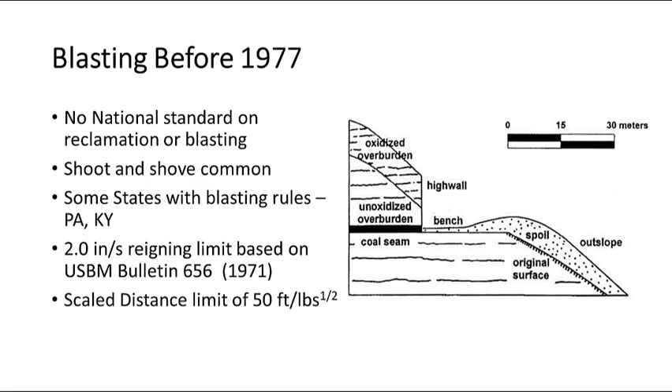So how did we get pushed into not only a blasting standard, but also a reclamation standard? Well, it all started with the Arab oil embargo of 1973, all right? And there was a smaller event in 79, but I'm gonna focus on 73. And what's interesting is if you look at the coal production over time from 1950 to 2010, and you look at where coal production was in about 1973, we were at about 400 million tons, 500 million tons on an annual basis.

And when there were long lines at the gas stations and people were concerned about energy independence, the government took on initiative to promote a move from oil to coal, natural gas, and/or nuclear power. So at that point in time, what happens to coal production? You see this constant rise up to well over 1 billion tons on an annual basis being produced, and a similar rise in electric power. Before 77, production was relatively flat in that interval, okay?

But what happened in 73 when the price of coal went up significantly? Anybody that had a backhoe, what do you think they became? They became a coal miner, all right? You now had power to mine coal that was at $70 or $80 a ton, I think, if I recall correctly, at that point in time. And there were lots of people that became very rich at that point in time as well.

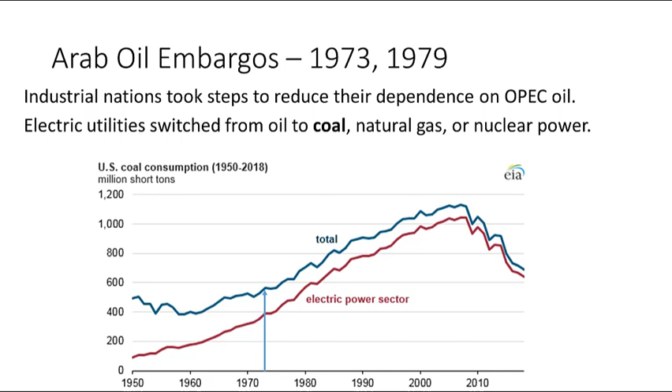But the mining methodology with no reclamation and the blasting, shoot and shove philosophy pushed Congress ultimately in 1977 to pass the Surface Mining Control and Reclamation Act. And this was because so many lands were simply being spoiled as a result of mining activity, and so many people were complaining about damage to their structures from a blasting perspective. So it's going to focus only on coal mining, but the Surface Mining Control and Reclamation Act, which created the Office of Surface Mining Reclamation and Enforcement, pertained to only mining of coal.

And Congress made it very clear at the onset, its main mission was to not only protect the environment, but to balance the energy needs of the country with the reclamation standards. And that's sort of referenced in our logo on the right-hand side, scales of justice. One side you've got a pile of coal, the other side some trees. So balance the needs of the country from a land use standpoint with the energy needs of the country, okay?

And the other thing that it did was level the playing field for reclamation standards. At this point in time, there were some states that had reclamation standards. There were some that didn't. One state, by having a lower standard, could promote the business in their backyard a little bit more than in the adjacent state. So they were a bit more competitive, their employment was a little bit better. This helped level the playing field and help preserve the lands of the United States.

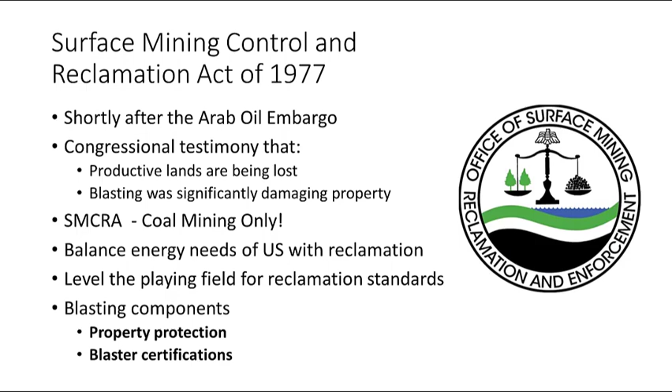But it also built in, because of the large public outcry, in particular the Appalachian area, about blasting related issues, property protection as one of its components, and we'll talk about the verbiage therein. And it also was the law that brought about the requirement for certifying blasters to ensure that blasts perform safely over the course of mining operations.

So what did the Surface Mining Act tell us we had to do from a blasting perspective? And here again, this is all headed towards how we're going to use 8507 to build a regulatory program. So what did Congress tell us we had to do? Okay, we had to promulgate regulations. And I'm not going to read this whole thing, but the number one item here was to basically limit blasting, the type of explosive detonating equipment, so as to prevent injury to persons and damage to public and private property outside the permit area.

So we primarily here are going to focus on the damage to public and private property outside the permit area from a ground vibration standpoint. Fly rock can certainly damage property off-site as well as air blast, but the purpose of the discussion is the ground vibration. So how did those vibration standards come to be through the regulatory process? Because fundamentally what Congress does is tell the government employees, here's what you need to do, and then we promulgate regulations to talk about how we're going to do that.

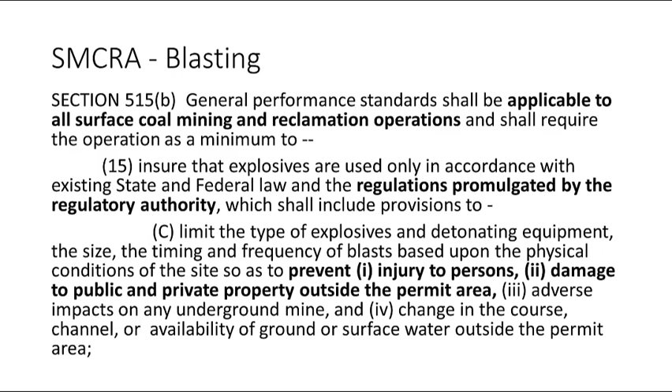So any rule that we're going to make to basically implement the will of Congress, which is to ensure they blast in such a way that there's no damage to public or private property outside the permit area, is relatively challenging.

All right. So what do we have to do? We're going to create a national rule, and Congress decided that since it's so complicated from a national perspective, we're going to give the states the individual rights to basically implement our rules. So OSM gives those responsibilities back to the states, but we do set a basic set of guidelines that they've got to follow. Those guidelines need to be scientifically based. And in this instance, what are we going to use? We're going to use 8507, because that was the primary document that was coming out at that point in time.

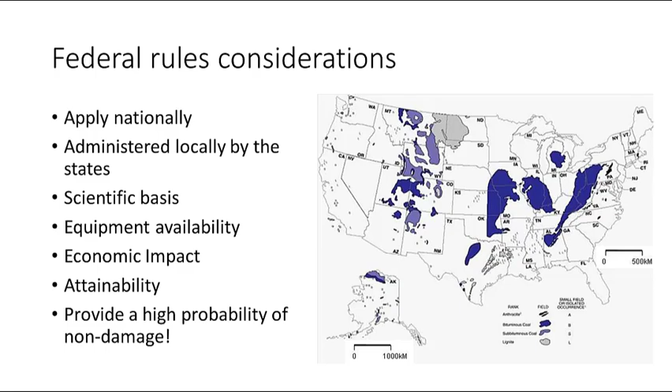Because as Chuck was talking about, everything that we do in this science part of our universe, it's all probability based, statistically based, and you never really get to that 0 point. You get pretty close, but it's not always there. So we can't absolutely draw a line in the sand and say on one side you're going to be good, on the other side you're not going to be good, because it's not a clear line because of all the variables that Chuck just talked about.

All right, so what are we going to talk about? I'm going to talk about 77 real quick. Congress said, okay, you got to be in business in 90 days. You put together some interim rules, implement those until you get a permanent regulatory program established. The first iteration was in 1979. I'm going to talk about each one of these individually. 1980, the courts overturned those rules, and you'll see how that is. 83, we went to our second iteration, adoption of the rules, which are still standing today. They were challenged once in 1993 with a Zell petition.

And basically what that is, anybody in this room, if you don't like a rule that you have, you can petition the government to change it. So just keep that in mind. It's meant to be a dynamic environment and change with the times and the equipment. And you as industry people or emerging professionals can take any new research from these conferences or whatnot, and petition the government to change their existing rules. All right, and then, where are we today in terms of the regulatory stuff?

All right, so in 1977, here again, before the publication of 8507, certainly they were well on their way at this point in time of putting together 8507. They had gathered a lot of the data. They had compiled some of their preliminary thoughts, and the US Bureau of Mines and OSM had some lengthy discussions about what they're doing and how we could implement the best technology currently available at that point in time into the regulatory scheme. All right?

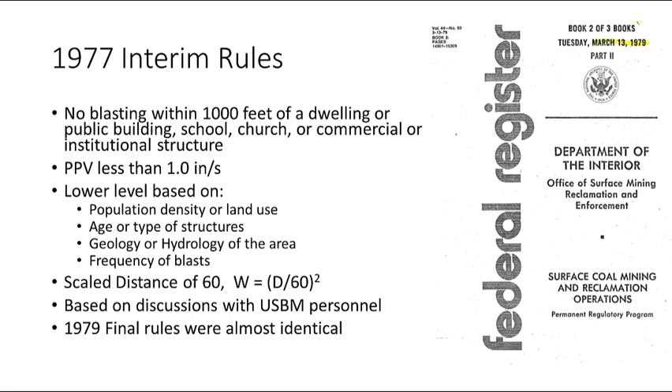Okay, and I've already touched on the discussion with US Bureau of Mines personnel. Key was discussion. This information hadn't been published yet. Courts do not look very favorably upon information that's not published. They call that hearsay, all right? So what happened in 1980, a judge overturned the 77 rules, which said 1 inch per second was the lay of the land, and made us go back to the 2 inches per second limit at that point in time, because that was what was justified in US Bureau of Mines Bulletin 656.

All right, so it explains why rules are hard to change, because they have to be based on information that's published, okay? So, they also overturned the blasting within 1,000 feet prohibition, all right? And that's sort of a sidebar, but there was only a prohibition in the act of mining within 300 feet. We tried to extend it to 1,000 feet, and they said, no, you can't do that. Congress didn't authorize you to do that. But that, again, was in part meant to help protect buildings from being damaged from blasting, all right? So it basically forced us to go back and rethink our process after those rules were overturned in 1980.

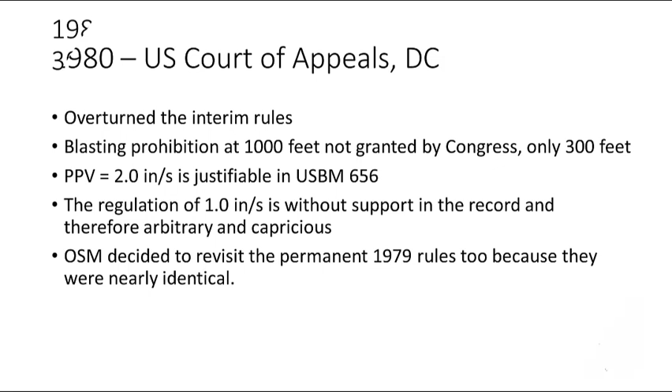Again, keeping a timeline in mind, about the same time RI 8507 had actually hit the street and was available for comment. And certainly the Bureau did take a huge amount of heat for that document. A lot of legal action, a lot of people asserting that this is going to put the mining industry out of business. Did it do that? No. It didn't. It ended up being something that was fully able to be implemented, but the vibration levels that they recommended there, as with many new things, it simply takes time. All right. So once it was overturned in 1980, OSM sort of goes back to the drawing board. 8507 hits the street. All right.

We require anticipated blast designs when blasting operations are within 1,000 feet of homes, okay? But that's meant more as an early warning signal to the regulatory people that they're getting close to houses. It doesn't limit how they're blasting as a general rule. But we did go back, and since this was published, we took a look at it and we set vibration limits that were based on frequency and particle velocity and based on the type of structure that exists.

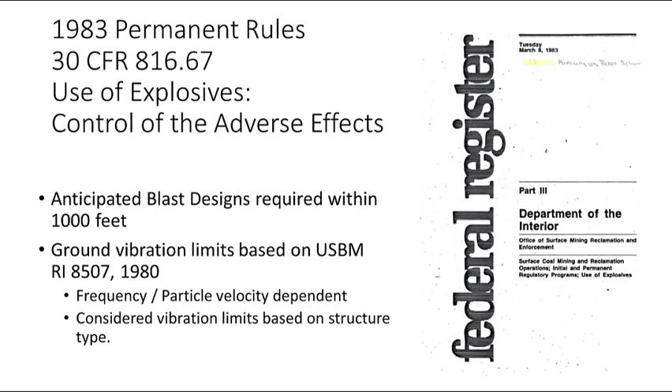8507 predominantly covers residential structures of 1 or 2 stories, as Chuck talked about, and he did structure response, little example with coffee cup, frequency and particle velocity dependent, but all those other structures have different abilities to withstand seismic impact. All right, and so how do we build that into the system? So when we first published our rules, we decided, okay, this is pretty tough to do on a national level. And we said, okay, we're gonna give you 3 options to comment on. And I wanna review each one of those 3 options because it illustrates the importance of looking at frequency, particle velocity, and structure type.

Option 1 that they provided was a chart over here with different types of structures that had different particle velocity limits at different frequencies. So for example, for structure 1, sensitive or protected structures such as a historic building, monument, and residence with construction elements such as plaster interiors and rough stone foundation walls. That's a whole lot more specific than some of the stuff that Chuck talked about, okay? Across the board, 1 inch per second, or half an inch a second.

Structure 2, older homes, more than 20 years old. So that means the RI 8507 was in 1980, so any house built in 1960 or earlier, basically. And that would hold true today. That's still the age that you would draw the line at, in my mind, anyways. Older construction elements such as plaster and lath interiors or deteriorated, rigid, and easily fractured construction materials.

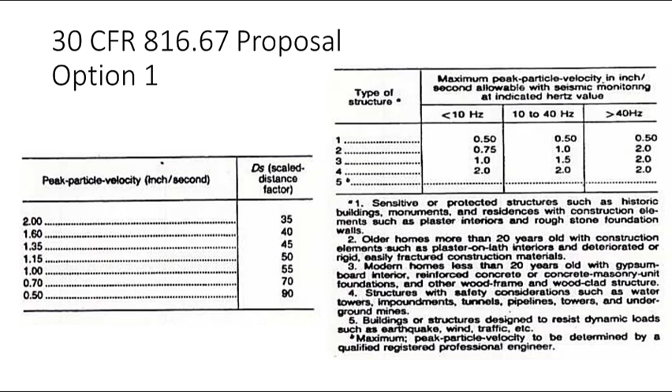So the regulator had to evaluate not only the structure type, but also the frequency and modify the particle velocity based on that. It's a lot of work. Or they could use these scale distance factors over here that equated to these particle velocities that are mentioned in the chart on the right-hand side. Okay? So it's a rather complex system to do that. You had to keep track of all the individual types of houses that were in the neighborhood.

Option 2 simply went with a distance to structure from the blast site. At various distances, they specified different allowable particle velocities. Well, what does distance bring into this equation? It brings in frequency. Generally speaking, close in, ground vibrations from blasting are high frequency. At more distant relationships, they're lower frequencies. So with increasing distance, frequencies decrease, and the allowable particle velocities at those distances also decrease.

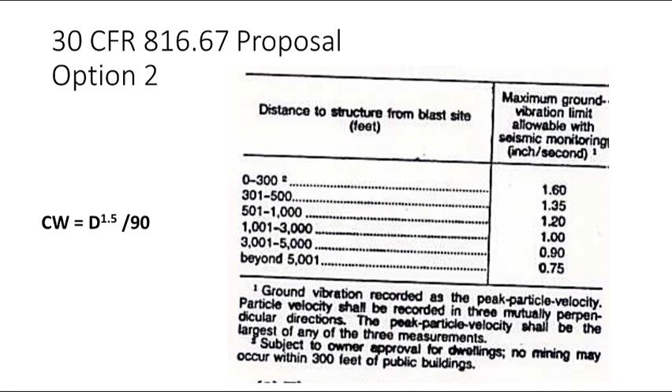All right? Or you could use this equation here, which is a different form than what we're accustomed to looking at, to determine the allowable charge weight. All right? Here again, this doesn't really cover the types of frequencies or the types of buildings. It just covers the frequencies and the particle velocities.

The third option was just the US Bureau of Mines Z-curve that was developed in Appendix B, or a flat peak particle velocity of 1 inch per second, or an allowable charge weight based on a scale distance of 55. So those were the three things we proposed. This does not include frequency in any way, shape, or form, or structure type, but this certainly includes frequency as well as particle velocity, and structure type based on the two-tiered approach, the Z-curve.

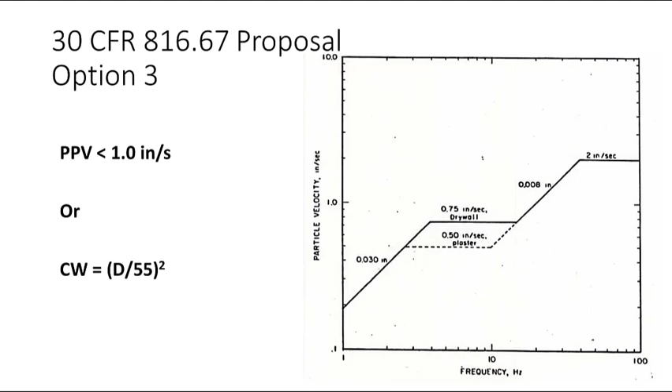All right, and we asked the industry and the public at large, well, what should we use? Got tons and tons of comments back. And we ultimately settled on this approach here. We went back based on the comments, which was a huge outcry in response to 8507, we can't live by that. We came up with a modified Z-curve over here, where we broke this line at this point here at 11 hertz, and this one here at 30, which is contrary to the 13 and 40 breakpoints on the Bureau of Mines Z-curve.

And we adopted a two-fold approach over here for ground vibration control based on distance: 0 to 300 feet, high frequency vibrations, 1.25 inches per second; 300 to 5,000 feet, 1 inch per second; and anything over 5,000 feet, allowable particle velocity was 0.75.

Where they came up with this 5,000 number, I have no idea. One great thing about the preambles of the federal rules is they explain what they were thinking at that point in time. I cannot find anywhere in the literature why they picked it. I'm sure most of you are aware that low frequency ground vibrations certainly occur well before that point, probably somewhere around 1,000 feet.

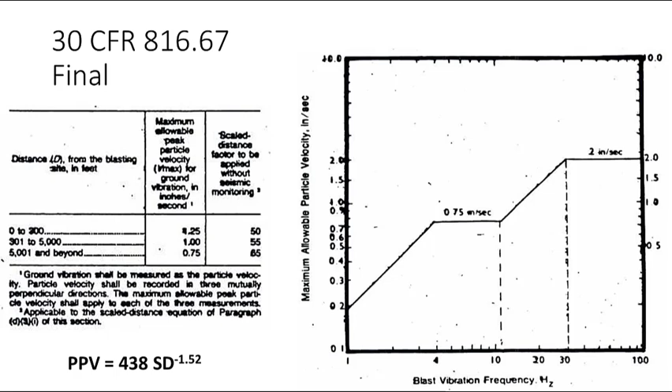Then there was also a scale distance counterpart, 50, 55, and 65 here, that equated to these different distances, frequency concern versus limiting ground vibration, and particle velocity and scale distance are tied together with that equation to get these comparable values here. And that's where we are today, okay, from OSM's perspective. Here's that chart, a little bit more well-defined.

They apply to dwellings, public buildings, schools, churches, commercial, or institutional buildings, all right? The regulatory authority is still responsible to lower those limits if necessary to ensure damage prevention. Okay, so they've got to look at the buildings on occasion and decide if there's a more appropriate limit or not. They can obtain those by virtue of pre-blast surveys, public comment during permit application or whatever. But as they become aware of more sensitive structures, they have the latitude and responsibility to lower those vibration limits.

All right. In terms of other structures in our regulatory scheme, water towers, power lines, any of the utilities category, they're responsible for approving limits to ensure that those properties, public or private, are protected as well. Some places simply apply these limits to those other structures as well. It depends on how people have written their regulatory program. All right.

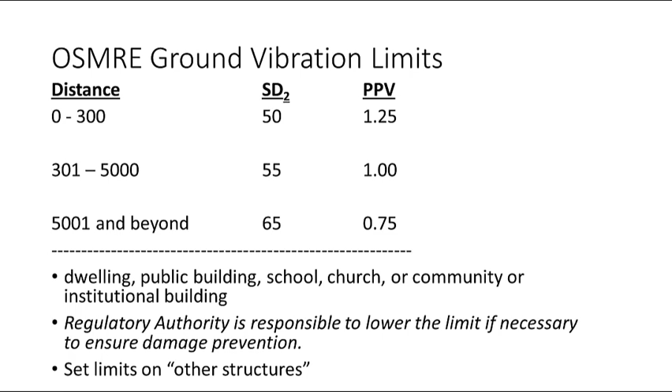For mid-range frequencies, particle velocity of 1 inch per second is appropriate. And below 11 hertz, a particle velocity of 0.75 is appropriate within our regulatory scheme. Each one of these lines in the sand roughly provide an equivalent level of damage protection or prevention. They're basically equally protected from a probability standpoint.

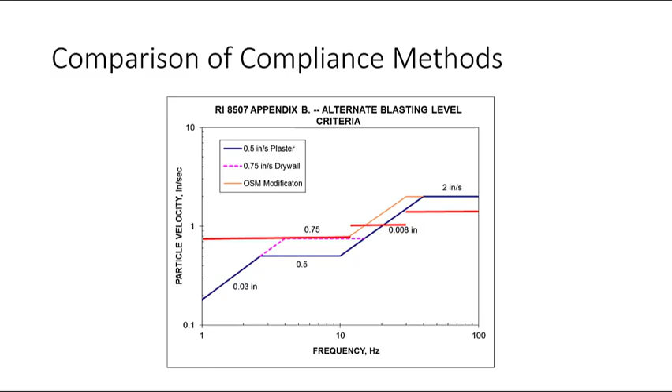So, where did we end up here? OSM was the first agency to adopt the modification, USBM 8507. All the coal mining states adopted our rules quickly. For other blasting, other than coal mining, though, a lot of the states just kept the 2 inch per second limit. That's very appropriate probably for many construction-related activities in close proximity to homes where the frequencies are high.

All right. Soon after, IME adopted the rules and NFPA adopted those rules, okay? But over time, when you go to court these days, the Z-curve is pretty much filtered back in. The original Z-curve from the Bureau of Mines has come back to reign. That's the gauge that everybody is using at this point in time to determine whether or not there's a possibility of damage. While OSM started this all and everybody else adopted it, the legal side of the house has sort of brought it back to the original version that was there.

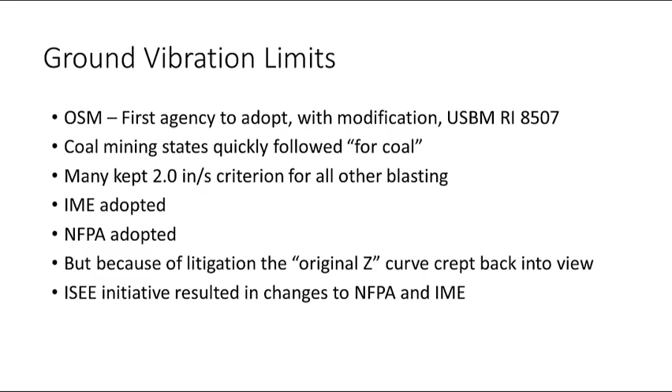And then since that had happened, IME or ISEE had an initiative that made a recommendation to NFPA that resulted in them changing their rules, and IME also changed their recommendations as well. So what happened at that point in time? Everybody went back, except for OSM. We haven't gone back and redone our rules just yet. They've gone back to the original Z-curve that you see here.

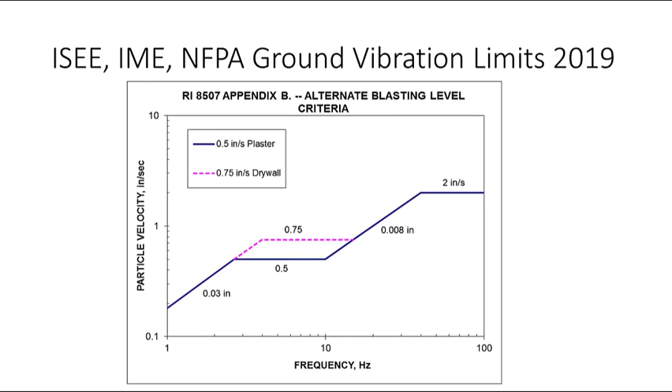Some states have simply adopted this lower line without consideration of the dash line up here for plaster or drywall related structures, okay? But by and large, the current best science available is this particular graphic itself. Is it easily attainable in the field? You bet. All the seismographs that we've currently got provide this information readily in the field on a day-by-day basis, whereas in the 80s, that simply didn't necessarily occur. So now it's a viable option.

And the other options, such as scaled distance, have been modified, okay? To these levels here, 50, 55, and 65, but at 1,000 feet instead of 5,000 feet. That's where we currently stand at this point in time.

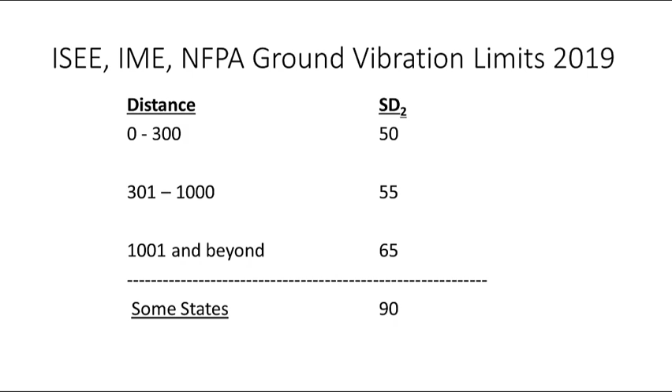So, where are we after 40 years? The Z-curve is alive and well. It's come back into our view full circle. Provides for a high probability of no damage. Used in a lot of legal cases. Adopted by all the professional societies at this point in time. Easily used with the blasting seismographs, and many states have adopted it.

And what are the keys that these all consider? Particle velocity, frequency, and structure type. You've got to take a look at all three of those to minimize the potential for damage in any given situation. So with that, I hope you have a little better understanding of the regulatory process and how the US Bureau of Mines 8507 and the Z-curve was brought into our current regulatory scheme to address the prevention of damage to all public and private property in close proximity to blasting applications. Questions?

So Ken, this question might be just as equally applied to Chuck, but at the time this was being developed, did folks at US Bureau of Mines have any idea how pervasive this Z-curve would become? At that point in time, I would say no. Last year at the annual conference, we inducted Dave Siskind into the Hall of Fame. He had no idea. Did you guys ever have any idea that it would come to this level?